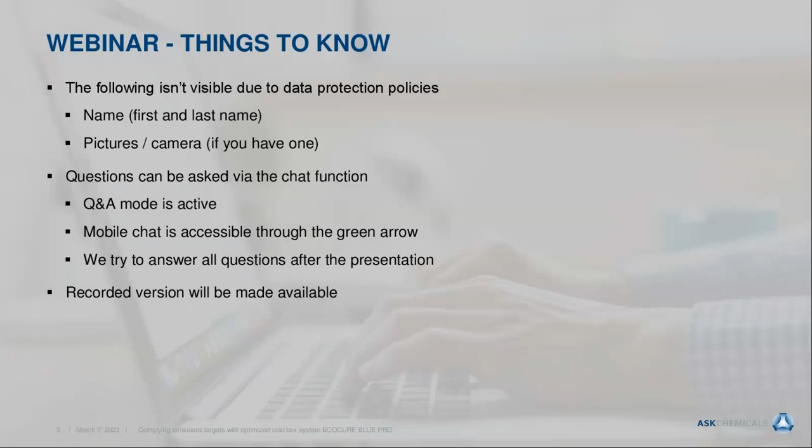In this webinar, we will try to explain a concept to help you reduce your emissions and reach your targets, and show you how a modern binder like the ECOCURE Blue Pro can help you reduce your cost by improving the production process and the quality of your castings. Finally, we will compare the performance of the ECOCURE Blue Pro to various other common types of cold box systems.

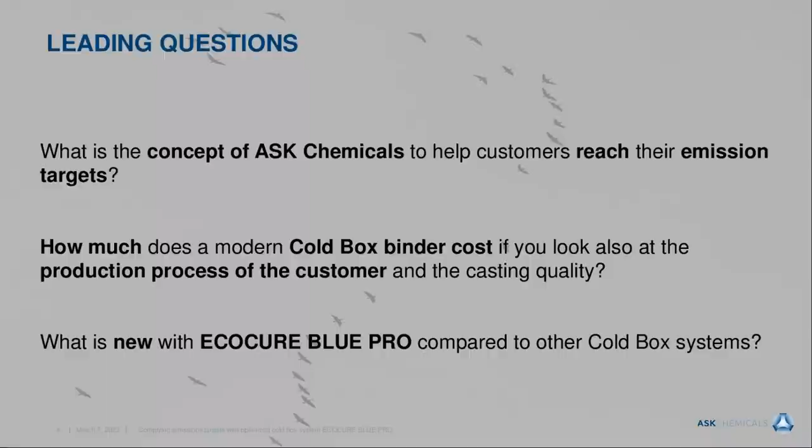So that is the agenda of today. Frank will start by differentiating the different emissions in the foundry process, and then explain how to reduce these emissions. He will then introduce the new ECOCURE Blue Pro and compare it to other systems.

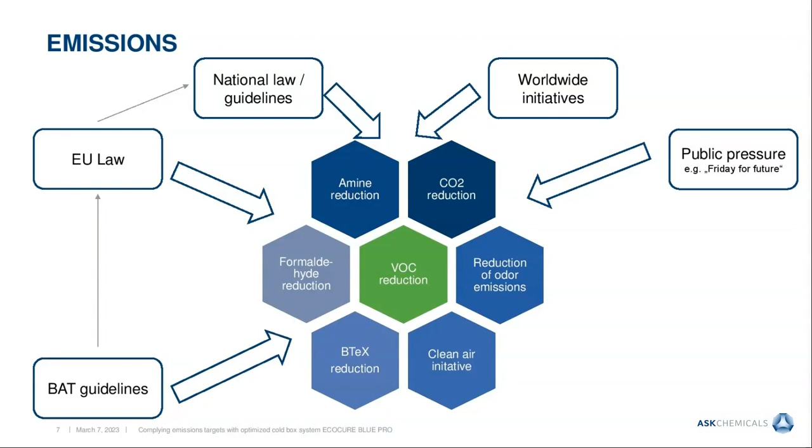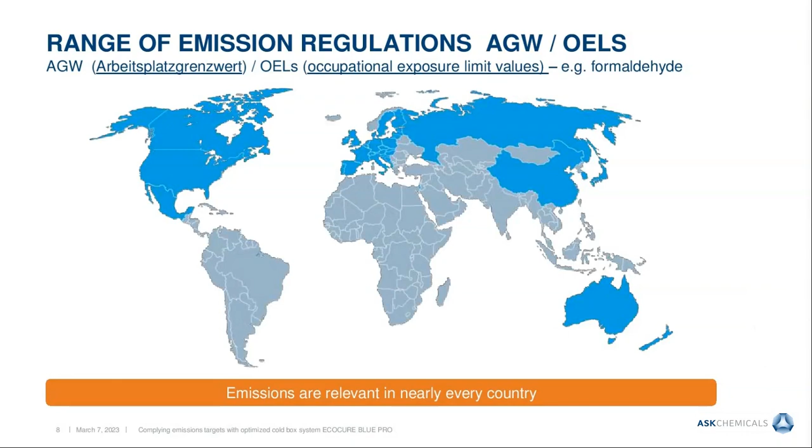In Germany, we usually regulate our emissions, and Germany has a leading position in this emission game. The values we define are mainly transferred to the EU, and then finally lead to national guidelines in, for example, Austria, Finland, France, and other countries.

This emission behavior is getting more and more an economical factor. Some automotive companies formerly allowed lead use in their process, but today it's not allowed anymore. I think it will come up the same with the emission theme, so you'll only be able to sell systems when you can prove that you use a system producing less emissions or low emissions.

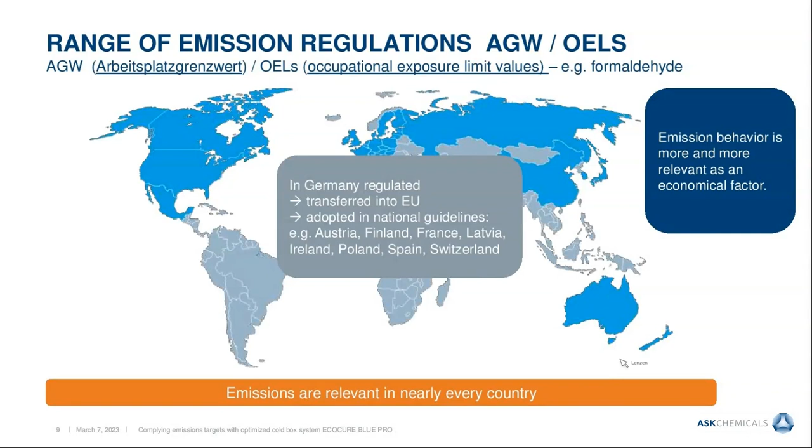So how is our concept, the ASK concept, to reduce this emission? Mainly emissions are produced by using organic binders. You put the organic binder in the sand, making mixtures, and then it's set free.

I think you know from the metal side a system already established in the market, the so-called bionic structures, which means you no longer have solid castings. You try to reduce the weight of the casting while keeping the structural strength. This is the bionic approach from the structural, constructing side.

Why should I do this? You have less cost because you have less weight of the casting itself, you need less energy, and you still have high structural strength. Maybe not the same as a solid part, but reducing the amount of material you're using is the same approach ASK is using for their binders.

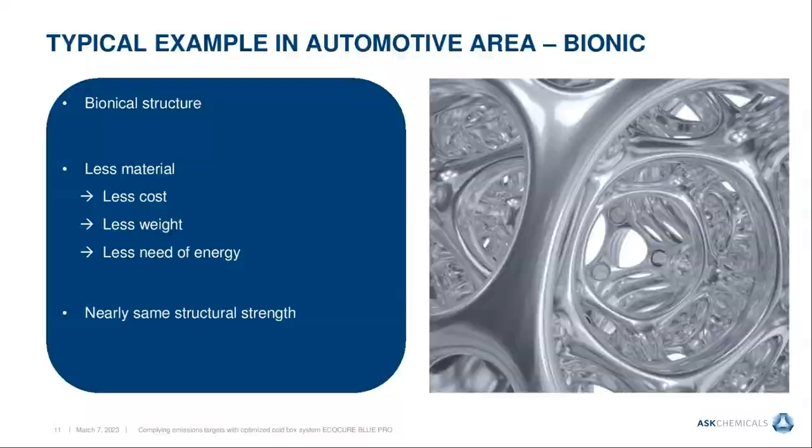So we have technical advantages when we use the binder. The first one is reducing amine, gas defects, and costs for sure. But there are also sustainability advantages like reduced emissions, less energy consumption, and improved CO2 footprint, because you need less of the organic binder. In addition, you have cost reduction and an easier way to recycle your sand.

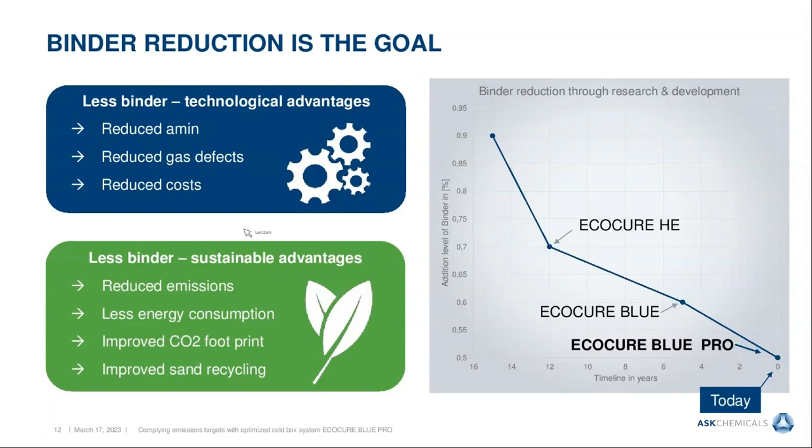So let's look a little closer at these benefits. Let me give you a small example. Let's say at the moment you're using a standard binder, and for a sand mixture per kilogram you use 7 grams of part 1 and also 7 grams of part 2, and additionally you have to use 0.4 grams of amine.

With ECOCURE Blue, you can reduce the binder level and also the amine level, which means a 30% binder reduction and also a 25% amine reduction. This is a reduction of amine, and if you also improve the process, you can go up to a level of 50% less use of amine than with a standard system.

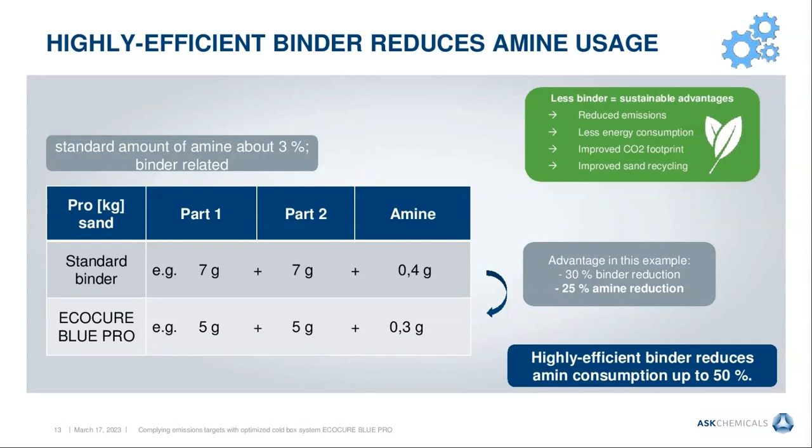All these benefits then reduce your emissions, and again lower costs, lower CO2 footprint, and improved sand recycling, just by reducing the binder. In addition, you have other positive effects, but even if you only look at the addition level you have to use to get the same technical strength, it's already a benefit.

Let's continue this example. We have now reduced the binder level in total, in the sand binder and amine, from 14.4 grams to 10.3 grams. So we have less binder, and this also leads, for sure, during the casting process to less gas volume.

Less gas volume means reduced tendency of gas defects. You can expect that your castings, especially when you're facing gas defects in your normal process, will be significantly improved when you switch from a standard binder to ECOCURE Blue Pro. Again, you have reduced emissions, costs, CO2 footprint, and all these positive effects.

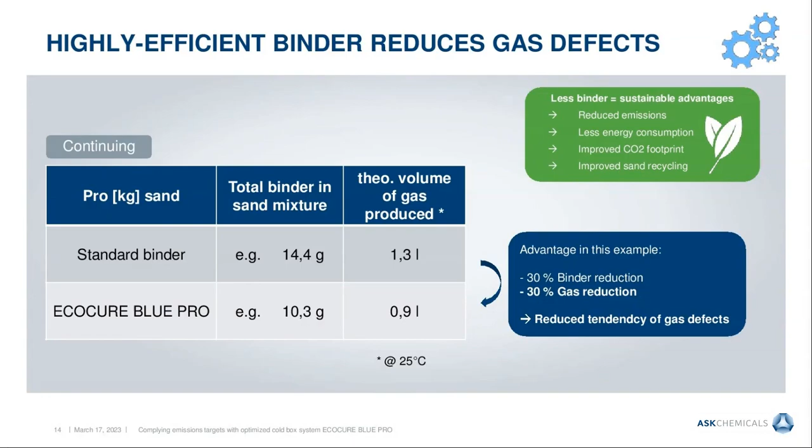Summarizing this small example: you have 25% less amine, which leads to specific advantages like less energy for curing, because less amine also means less heating. You have a longer service life for the amine scrubber, because less amine means less acid on the counterpart needed to consume the amine. You have less smell and direct emissions, so maybe you can modify your venting, and your employees will also like having less amine in the air.

On the other side, we have a reduction of binder, which leads to better flowability and less sticking in your tooling. This may allow you to reduce your shooting pressure and also increase the cleaning intervals of the tooling. So these are more or less specific advantages per part, and in total, for sure, you also have positive cost effects.

Less binder means less transport costs, and less orders means less transport costs too. I already talked about the reduction of binder of organic material, which leads to less gas defects, so that's another benefit: fewer casting defects. On the other side, you have costs to deposit the sand. If you have less organic and less toxic organic material in the sand, it's easier and cheaper to deposit, so overall disposal cost will be lower. So there are a lot of good cost arguments to use a new binder system.

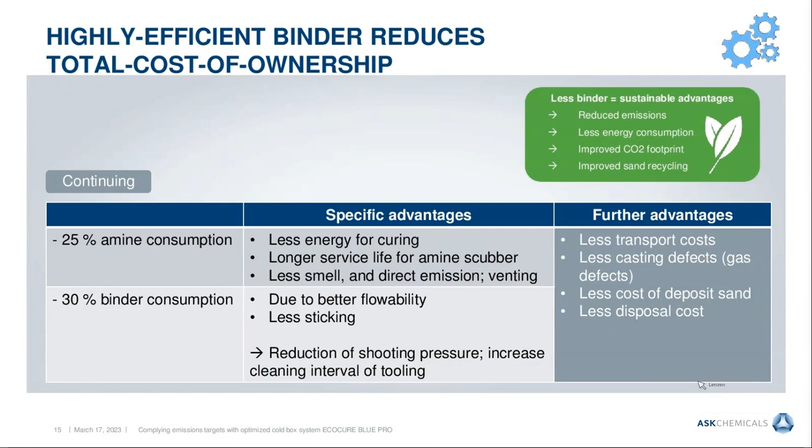Let me give you a small overview of the systems we can offer. We mainly want to talk about EcoCure Blue Pro, but we also have other systems in the portfolio. There are two indicators: one is environmental, one is performance. With EcoCure Blue, you have a really good compromise with low environmental issues and at the same time really good performance. There are other systems on the market, also from ASK, needed for production and for the process, but today we want to talk mainly about EcoCure Blue.

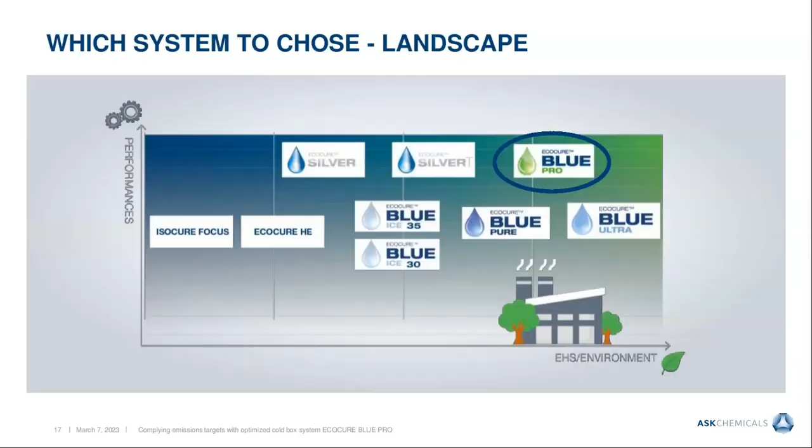So let's talk specifically about EcoCure Blue Pro. We're coming from a standard binder, and in the standard binder you have several substances, indicated here in red, which are not really healthy and may disturb your curing process. There may be solvents which are smelling. So all these complicated and unliked ingredients we already eliminated with EcoCure Blue.

But even more, based on this EcoCure Blue, we tried to develop the next level, the next step: EcoCure Blue Pro. In principle, we took this blue technology and developed it one step further.

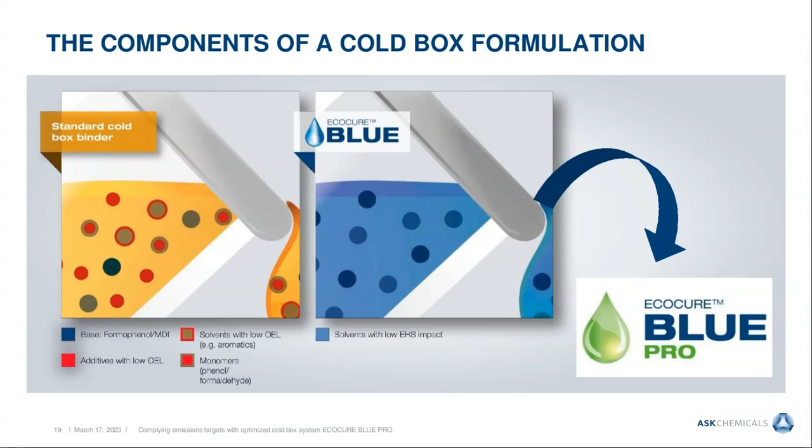Here you can see how we developed EcoCure Blue Pro. We started with EcoCure Blue, a system used by about 120 clients in Europe. Not all of them are buying EcoCure Blue, but a lot of them. So based on this experience with EcoCure Blue, we asked customers what we should improve with this system.

We found that even with a good system like EcoCure Blue, customers are searching for higher reactivity, to speed up the process, get faster, and use less binder. On the other side, we have the emission task we talked about. In Germany, there was new regulation one year ago where the limits were significantly reduced. In the process, there was also a requirement for less sticking tendency and better cold storability, especially for the Northern Europe area, so we had to improve EcoCure Blue. And also a reduction of total cost of ownership, since cost is always an issue for foundries.

Based on these requirements, we first developed a new basic resin, building on the experience from EcoCure Blue, but modifications were necessary. Then we started an optimization in the dilution process, searching for new solvents, and finally we adapted part 2, the isocyanate part, and tested the performance. The result was EcoCure Blue Pro.

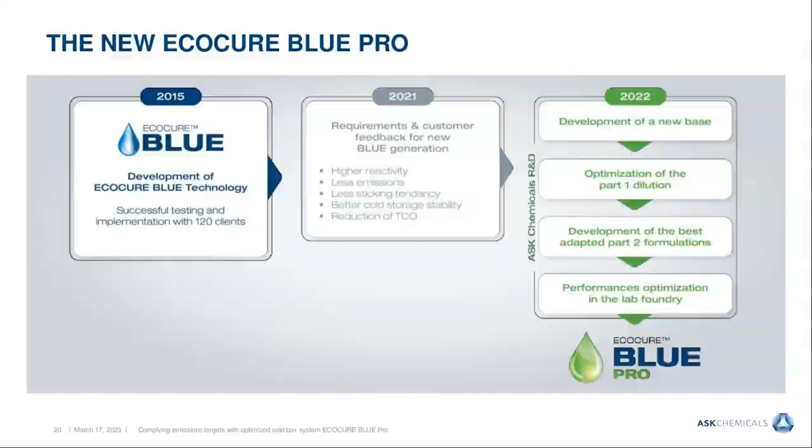If you compare with other systems, this is one of the benefits of the Blue family, and for sure also for Blue Pro: it's free from pictograms, so it's no hazardous substance per definition. You can store it -- I don't want to say wherever you like, but this is the only material on the market which is not hazardous anymore in part 1.

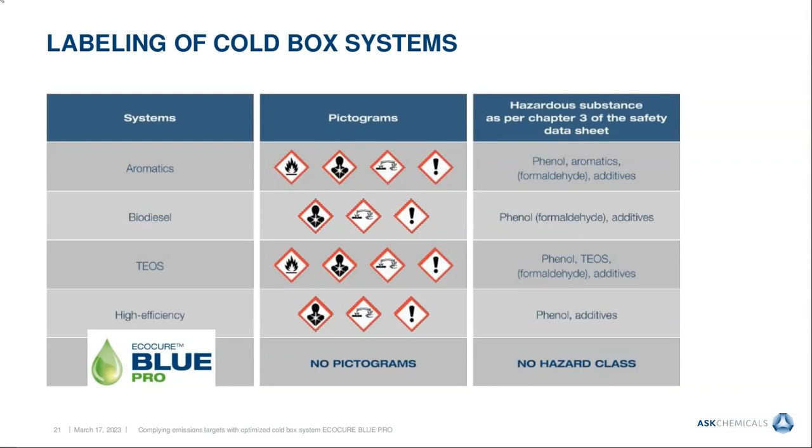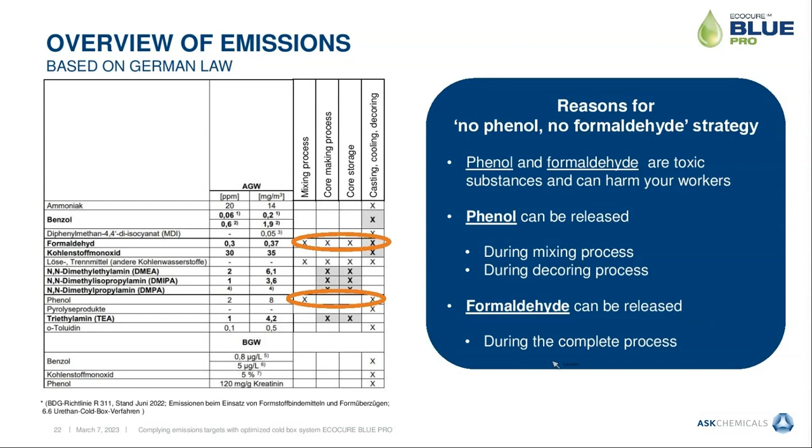Phenol and formaldehyde are toxic substances and can harm your workers, which is why usually every country has a limit for these substances. Phenol can be released, as shown here, during the mixing and decoring process, and formaldehyde can also be released during the complete process. So we had to get rid of these substances.

So on the other side, we have this phenol in the waste sand side. On the waste sand side, phenol is also a relevant parameter. Phenol and phenol index can lead to problems when you start to deposit the sand. At least you have to pay more for it if you have higher values in the sand. So the target is to reduce the phenol also in the waste sand side to make it easier to deposit the sand. So the strategy is no phenol, no formaldehyde.

And this is with the modern systems, with the blue technology, state of the art. This is what all suppliers on the market try to reach, and ASK already today is able to deliver such systems. So this is state of the art. The old systems are not requested anymore.

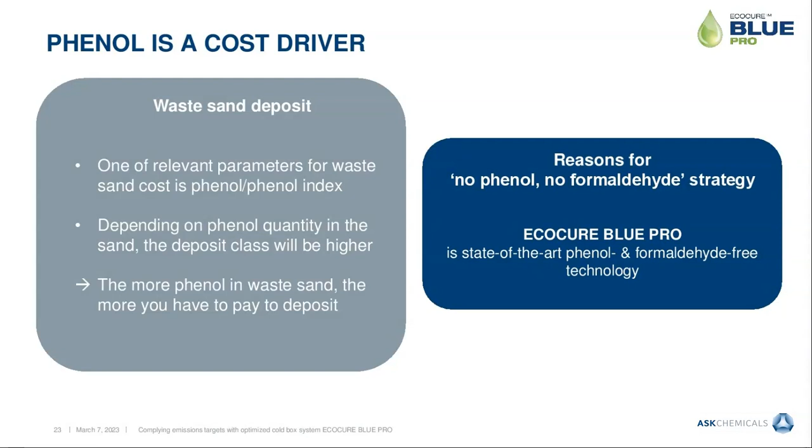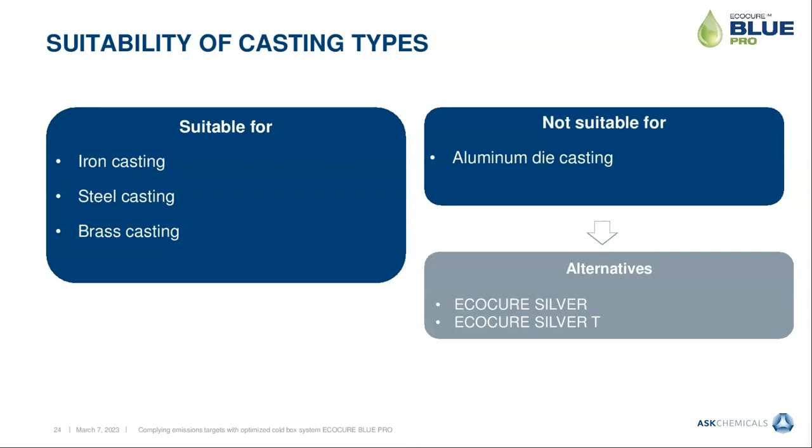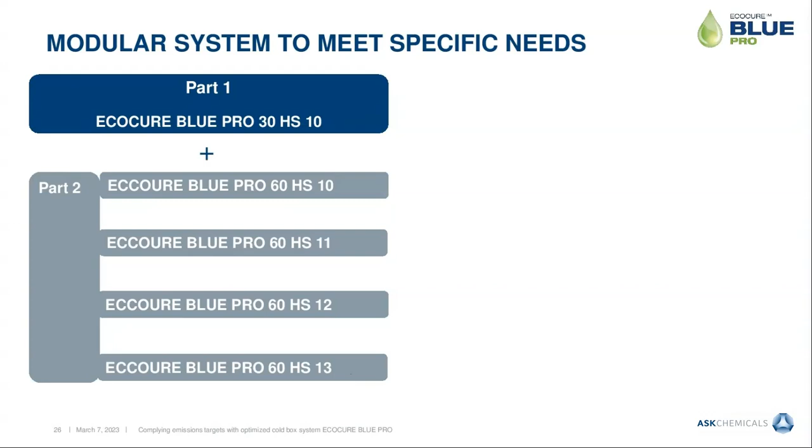So let's talk about this modular system. We have a part one which we can offer. This is ECOCURE Blue Pro 30HS10. And then we have several part twos. So why several? Because depending on the needs of the customers, we can offer different behavior. So first of all, we have the standard application. This is used for the main applications.

But if you need, maybe due to a situation where your reclaimed sand has green sand inside, which happens sometimes, you have to use a different part two. This can compensate not everything, but a lot of different problems with reclaimed sand. Or if you have, let's say, aged tooling, so the surface is a little bit rough and we have problems with sticking, then you have another part two. Or we find a compromise between bench life and sticking, then we take another part two. And even if these are not suitable, we are able to develop an individual part two for your process if necessary.

So this is always the same part one, without hazardous indicators, without phenol, without formaldehyde, and then several part twos depending on your process.

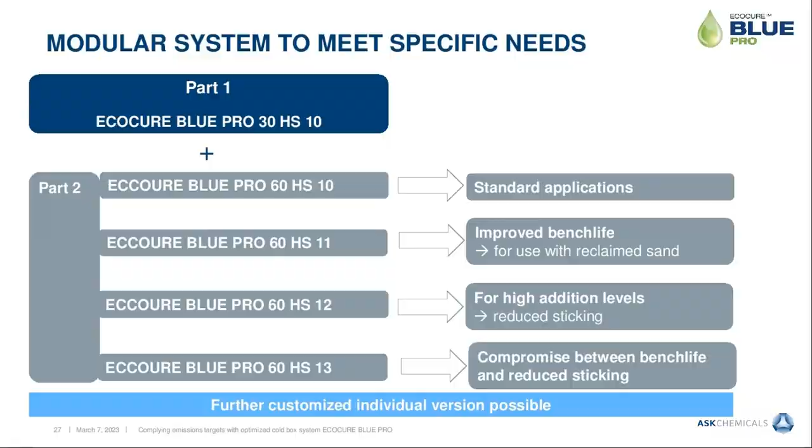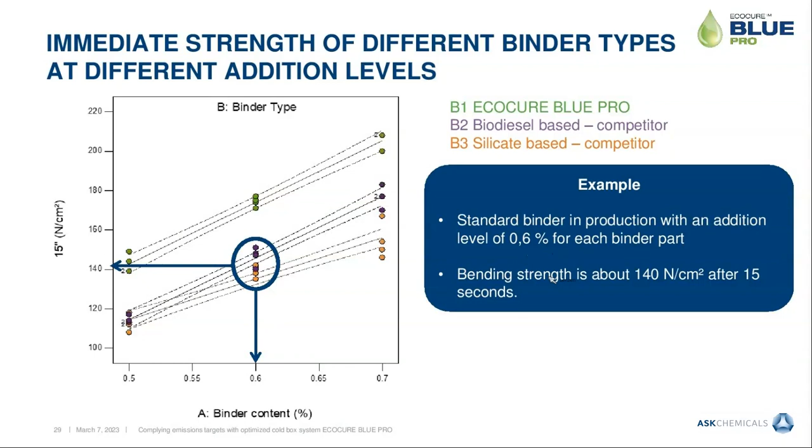But you also see the different binders; we have three here. The green one is ECOCURE Blue, and the purple and the orange ones are systems on the market from competitors. You see that there is a significant difference in strength. So the question would be, if you work today with a standard binder at a level of 0.6, and you're getting 140 Newton per square centimeter after 15 seconds, which is indicated here in the diagram,

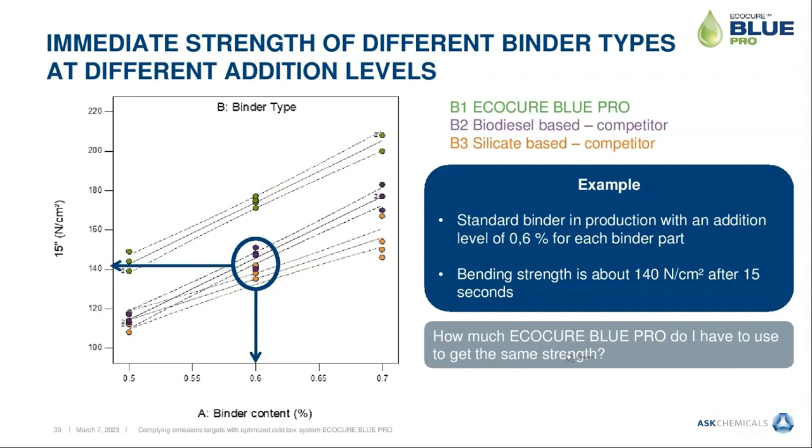how much ECOCURE Blue Pro do I have to take to get the same strength? Mainly the out-of-the-box strength is one of the most important ones, because if you want productivity, productivity relates to how fast I can take the core out of the box. So immediate strength is quite important. Again, how much ECOCURE Blue do I have to take? Quite easy. You can see it here, about 0.5 each part to get the same strength. And in addition, you can also reduce the amine consumption, because less organic in the sand means you need less amine for curing.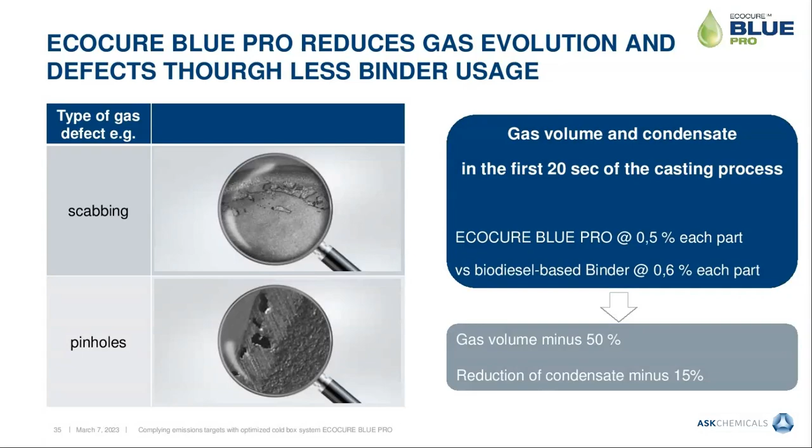Okay, so for those which are already using the Blue technology, why should I use this Blue Pro technology? What is the difference? So again, a few technical slides. So here you can see a comparison of bending strengths based on silica sands. So we are taking Blue and also Blue Pro at a level of 0.6 each part and compare the strengths. Again, the immediate strengths on the left side after 15 seconds. So this is responsible for your productivity.

Also the 30 seconds, the second bar you can see. And then till 24 hours, and also the last bar, 24 hours at 98% relative humidity, you can see that Blue Pro is always better than your already used Blue system. So we have between 10 and 20% more strength. So this leads then to the reduction of 10% based already on the EcoCure Blue.

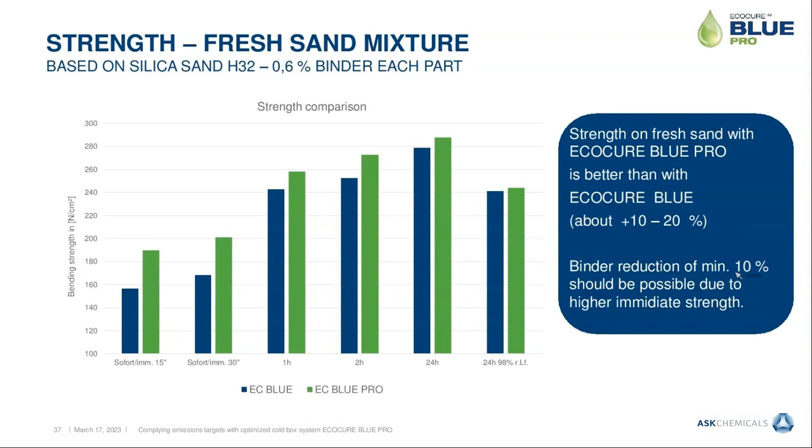This is the bench life. So if you have the sand mixture in your hopper and your core shooter, it's aging. And if you have a problem at the core shooter, maybe with an old system, the older system, and the Blue maybe also, you have to clean your sand bunker. You can also see that with EcoCure Blue Pro, again, here's an improvement.

So we have higher strength even after a storage of 2 hours. So we let this sand mixture 2 hours in the sand bunker and tested the strength level. You can see there's also a significantly better behavior. Again, 10 to 15% better strength at the same binder level.

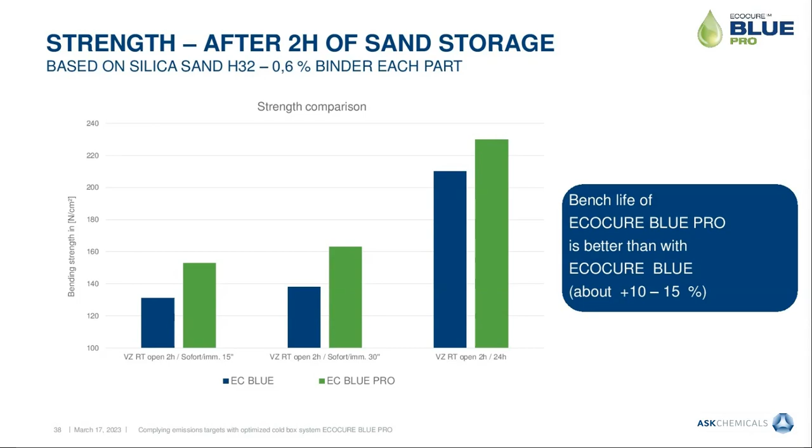This is then the coating compatibility. So you can see that the coating on the wet core, on the hot core, and also after the cooling process, so the simulated drying process, you have an improvement of the EcoCure Blue Pro system if you compare it to the Blue. Blue Pro in green, Blue in blue.

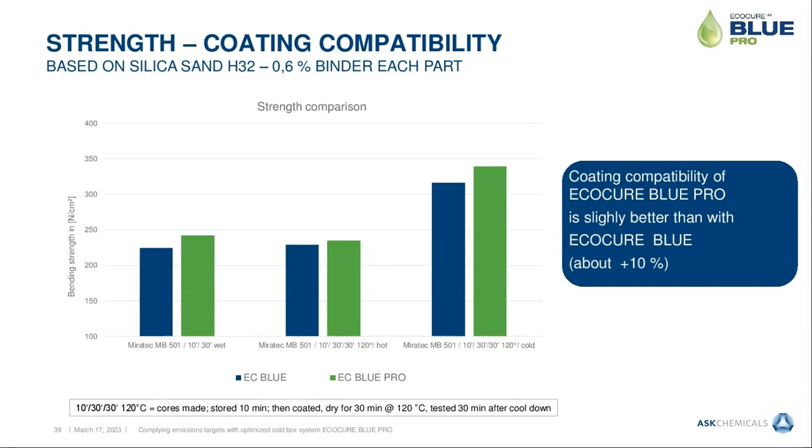So, and here we have the deformation tendency. So this means you coat a core, so water is always disturbing the curing process, and you put it on a rack maybe to dry it or to transfer to the drying oven. And if your complex structure is pushing or pulling on the core, it's maybe deforming. So the deformation, which we measured here, is relevant for this process.

So you can see with the standard system, the purple one, you have a deformation of about 1.1 millimeters. With the Blue, you have only 0.5, and on the same level as the EcoCure Blue Pro. So very low deformation tendency, which is very good for dimensional accuracy. And yeah, it's definitely a pro for the Blue Pro system.

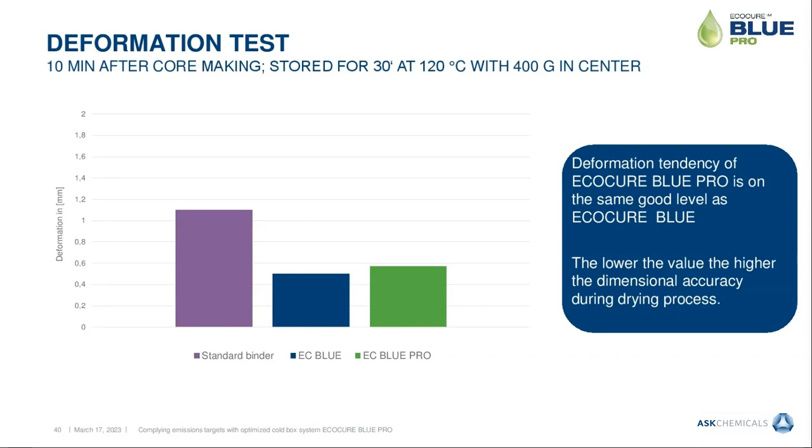So the first slides are based on the German H32 sands. And these diagrams are now indicating the different sand types you can find on the market, a few ones. So this is a Spanish one, Arena C60. You have the comparison between both systems, Blue and Blue Pro. And in addition, you have a third bar, which is indicating the strength behavior when you reduce the binder by 10%. So you can see that even when you reduce the binder, you're still at minimum at the same level as the old system with the EcoCure Blue.

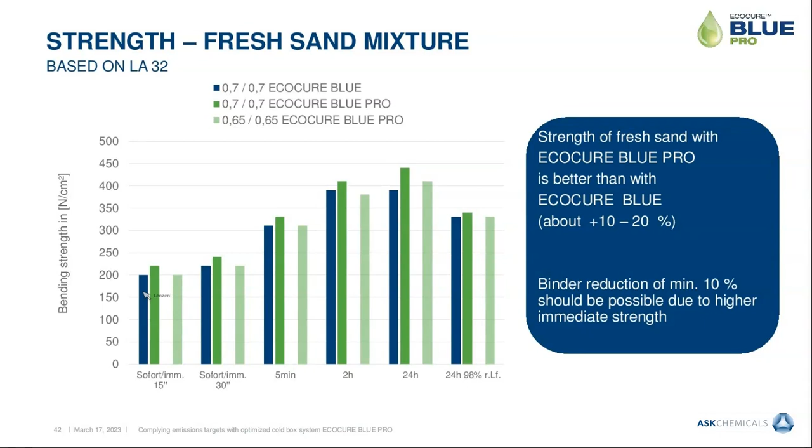So this is based on the Spanish sands. Then we have this LA32 sand. And again, the same behavior with a reduced binder level. You're at least at the same strength level as the old system. So 0.7 was old, 0.65 with the new system. And also again for the immediate strengths and also for the stored cores.

So again, here's the Bascarp sand, which is also more or less common in the Northern Europe area. And again, you see that there's an improvement with the new Blue Pro system compared with the Blue system. So it's the same picture, Blue, Blue Pro. Blue Pro has higher strength, so I'm able to reduce the binder, and still I have higher initial strength than with the old Blue system. And over the whole curing process, we have this benefit of about 10%.

So this means the Blue and Blue Pro systems are suitable for nearly every sand type you can find, and we have better performance, at least the same with 10% reduced binder than with the old system.

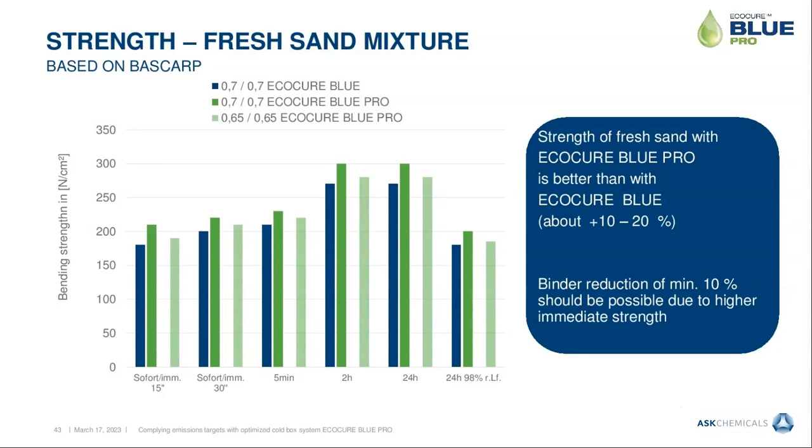So let's summarize. First one: we have no hazardous product in part one. So it's free of any hazardous indicators. Phenol is below 1%, formaldehyde below 0.1%. This Blue Pro has been improved in storability. This binder is stable down to minus 20 degrees centigrade. So again, especially for the Northern Europe area, it's quite good.

We have higher strength levels with ECOCURE Blue Pro than with Blue, and for sure also with other common systems. Compared to Blue, we have 10 to 20% improvement. If you compare it to standard systems, I think the improvement will be even higher. So the binder reduction we can establish with the Blue Pro leads finally to reduced emissions. We have reduced gas potential, which is leading to lower gas defects.

We have less organic, which means less sticking. So there's another benefit. You can maybe reduce the amount of release agent you use. You definitely can reduce the amine consumption. It's another cost factor and also an emissions factor. And you have significantly lower leachable phenol, which for the deposit side is definitely a good argument. And compared to ECOCURE Blue, when you know this system already, there are no drawbacks compared to the older system.

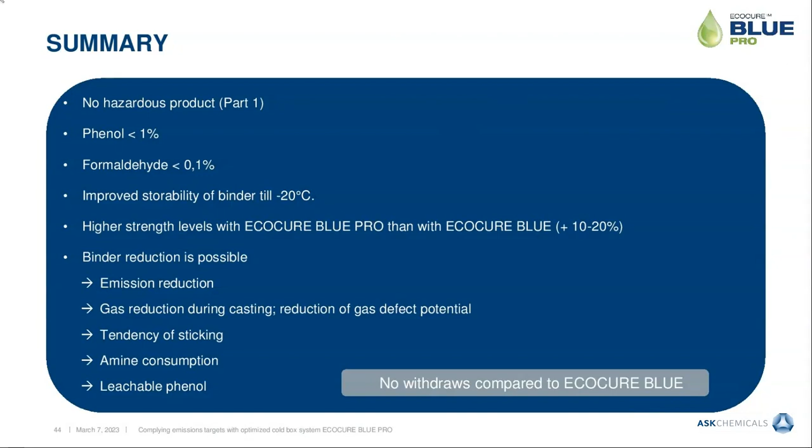So, conclusion. We have a highly efficient technology with this ECOCURE Blue Pro, which is state-of-the-art technology. You can use less binder, less amine. I talked a few times about this issue here. You have great performance. If you compare to systems on the market which have good performance, this system is even better. You have improved strength, less sticking, which is good for productivity and also for costs.

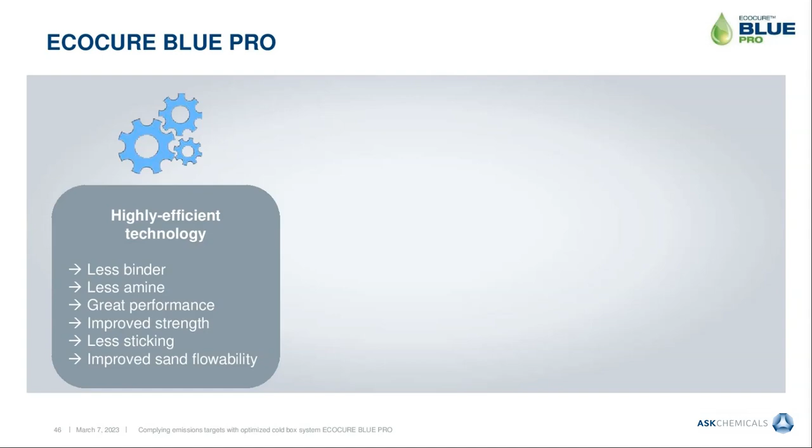And you have improved sand flowability because, again, organic on the sand blocks the flowability. And if you reduce the binder amount, this will also improve your sand flowability. On the other side, you have the option to reduce your total cost of ownership, so your process costs. Less energy you have to use in the process, less heating of amine, less use of the amine scrubber. You have less energy costs, again, less amine, less heating, less rework.

If you have better castings and you were able to prevent the gas defects, you're getting more good castings at the same time. So higher productivity because the initial strength is quite high, so production cycles can be shortened. Less cleaning, less organic means less sticking. So again, productivity arguments.

And no investment needed is in brackets because, depending on your process, if you're able to reduce binder and amine, maybe you're in a situation where the emissions are already at a level that you don't have to invest in a costly secondary heat treatment to reduce all the emissions. So no investment is in brackets because it depends on your foundry and the size and geometry of what you're casting. But for sure, the emissions will be reduced, and then maybe you don't need any more heat treatment or air treatment to reduce emissions to a level that fulfills government requirements.

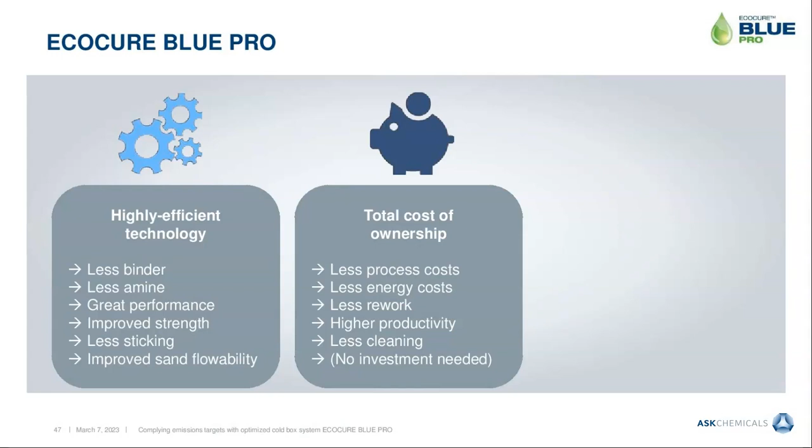On the environmental side, again, you're reducing the emissions. You have no hazardous labeling. You improved your OEL level, so the workers will like that, and you will secure your workers for emissions from organic binders.

Again, less energy consumption. Energy is quite expensive. You're improving your CO2 footprint, and you can also improve your recycling system, so less organic on the sand also produces less waste in the recycling process of the sand.